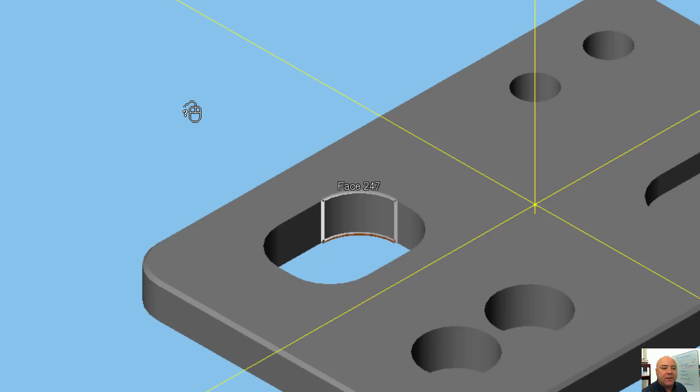The pocket that we have here that goes through the part is this one in the upper left-hand quadrant. We're going to go ahead and select this face. When we're in our sub-element highlight mode here, it asks us again, is this the surface you want? So that is the surface that I want.

But what I want to do is hold down the Shift key while I left-click, and then it will select all of the similar surfaces that are adjacent to that. So what it's done now is it's selected all of the surfaces that define the edges of that pocket.

If I go over here to my Create Features toolbar, I can select the pocket icon right here, and it will create this pocket chain feature, which is what it really is. It's a way for Esprit to identify that we intend for this to be a pocket. It looks like a pocket to us in this orientation, and we've now told Esprit that yes, indeed, we want that to be a pocket.

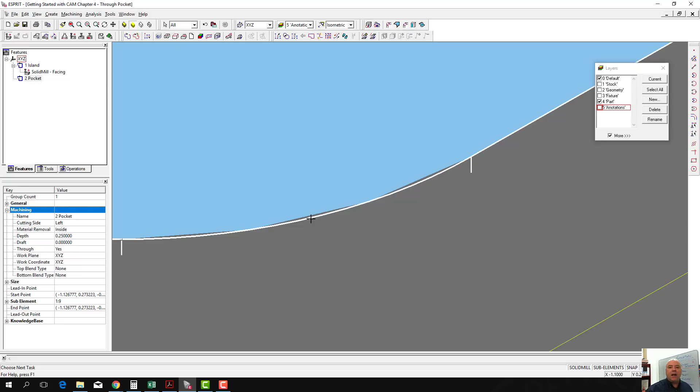And when we have our pocket here, if we go to our parameters view in machining, we can see that we want to cut on the left side of the pocket. If you look here, there's an arrow that goes around the edge of the pocket. So it's telling us we want to keep the tool on the left side of the pocket.

And if we're doing just a contour in there, if we're doing a climb milling operation, then if the tool's spinning clockwise and we're offset on the left side inside a pocket, it's going to climb around that edge. So I kind of like that. We're going to remove material inside.

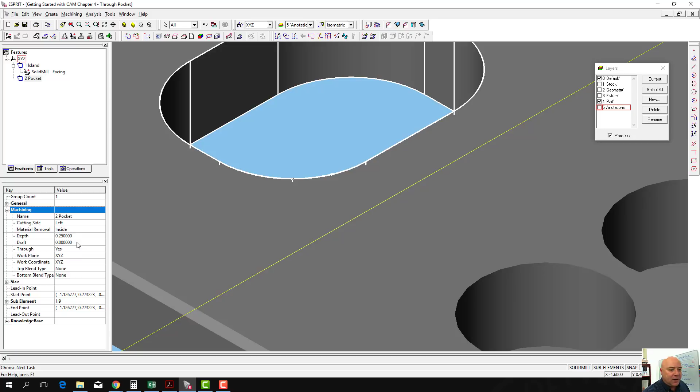It says the depth is 0.25 inches, and that's because the distance from here to here is 0.25 inches. It says the draft angle is 0, which means if we had created a solid model that had a draft angle, Esprit would detect it right here. We're working in the XYZ work plane. All these things, we like this.

All right, so we can create our pocketing operation simply by selecting that pocket. We'll go to our Solid Mill Traditional toolbar, come over here to the pocketing icon, and select that. Now, just like with our facing operation, you have to tell it what tool you're going to use. We have to use a tool that can fit inside our pocket. So we're going to use this 3/8 inch end mill.

I'm going to drag the properties tab down a little bit so we get some more space up here. It asks us, do we want to do roughing passes? Do we want to do wall finish? Do we want to do floor finish? Now, since the pocket's going to go all the way through the part, we absolutely don't want to do floor finish. We're actually not going to do the wall finish either. We're going to set that to no.

It's typically better to set this to no and then do a contouring operation later to do your wall finish if you want to do that. Just do it in separate operations. It gives you a little bit more control with how you do it. In the strategy tab, there's a bunch of different choices. We can choose, do we want it to start on the outside of the pocket and work towards the center?

Do we want it to start in the center of the pocket, work towards the outside? Do we want it to simply go in one direction, starting at one edge of the pocket and go across to the other? We can zigzag like we did with our facing operation. We've got our trochoidal, which is where it will actually take little circular passes to go through the entire pocket, and then profit milling. We're going to leave these things for later in the discussion.

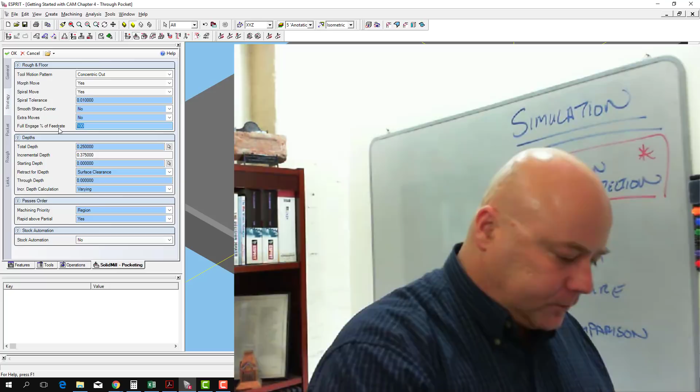Now our full engaged feed rate, we can actually look up on our feed and speed chart. But what this is, here I've got an end mill right here. Whenever the entire end mill is engaged with the workpiece, so if it was feeding through like this and making a slot in the workpiece, that would be when the full engaged feed rate kicks in. And so typically we do 80% for this. So I'm going to set that to 80.

Our total depth, it read this total depth based on the depth from our pocketing operation, remember there. Our incremental depth, because we're using the 3/8 inch end mill, our incremental depth that we're allowed to do is 3/8 of an inch, so that's fine. Starting depth is 0. That starting depth is measured from the top of the chain that you've created. We like all this. We can have stock automation on or off here. It doesn't really matter because the workpiece is in the center here and we don't need to trim anything. On the pocketing tab, there are no islands that stick up in our features, so we can ignore this.

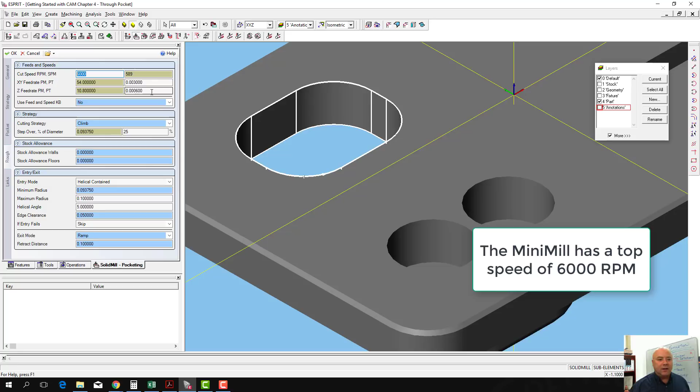On the rough tab, this is where we get to set the feed and the speed. Our tool is able to go much faster than this 589 surface feet per minute, but the mini mill that we're going to cut this in is limited with a maximum speed of 6,000 RPM. So we're going to stick with that. So 54, 10. These numbers look okay. You can verify these numbers on the feed and speed chart that you downloaded in the last exercise. Don't just assume that every time I'm doing this, I've got the correct numbers here. Make sure you look those up.

We'll go with our cutting strategy climb. That way, when it is not fully engaged, it will be pulling itself into the workpiece as it goes around there. Stock allowance walls, 0, floors, 0. There's a couple different entry modes that are possible. What we don't want to do ever is plunge. We don't ever want to have that end mill move straight into the workpiece on a downward plunge, because we know at the center of the end mill, the surface speed, the cutting speed is 0, and so it's not intended to cut in that direction, or it doesn't cut well.

So we can either do a helix, where it does a spiral on the way down, or a ramp. Just based on the shape of this pocket, I'm going to go with ramp. So ramp along pass. I like ramp along pass. For these tools, we want a ramp angle of 10 degrees.

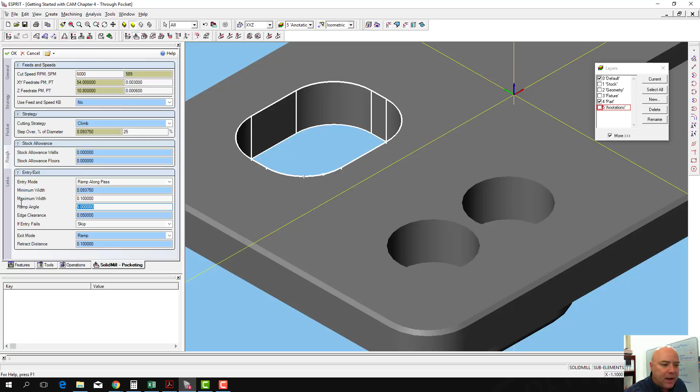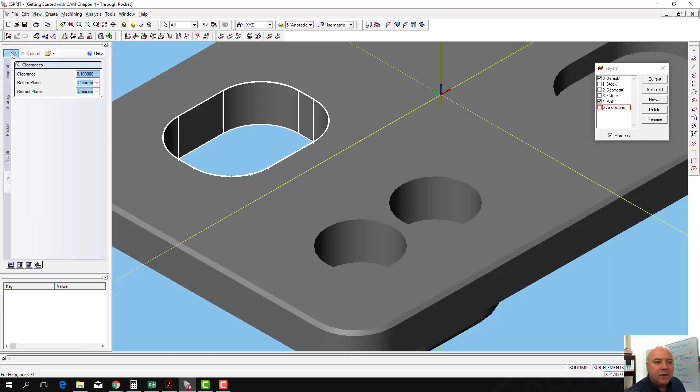Minimum width, maximum width. If entry fails, skip. Make sure you select this. If entry fails, skip. And then the only other option there would be plunge, and we never want to plunge if we can avoid it. So exit mode is ramp. That looks fine. Links, clearance, okay. So we'll go ahead and click OK here, and it created us a tool path.

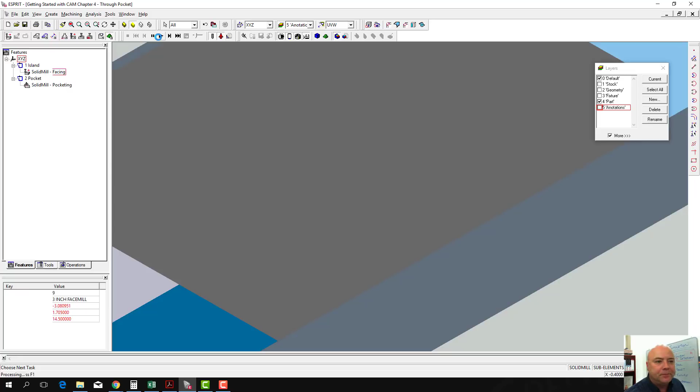If we go ahead and simulate, now before we simulate, let's make sure that we've got collision detection turned on. So collision detection, full. I'm going to go ahead and click OK. We'll simulate the operation here. So it's doing the facing pass now. It's finished with the facing. It should do our pocketing operation.

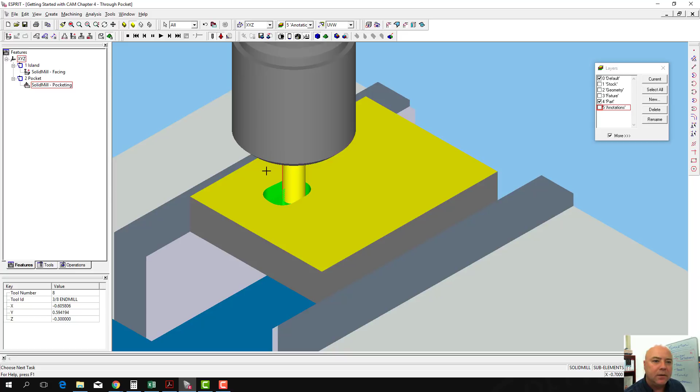Okay, so it's coming in. That's doing the ramp down into the workpiece. Once it gets down to the depth, it will go ahead and spiral out to the finished dimensions of the workpiece. I can speed that up. All right, so that's done. I'm going to go ahead and turn on our comparison window here. And so it shows that the floor is blue there, but that should go all the way through.

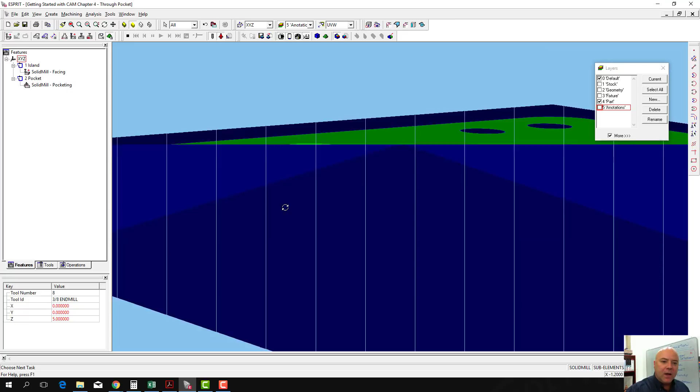Now, at the beginning, I said that I wanted our pocket to actually go all the way through the workpiece, not just through the part. And so we can fix that. If we hit stop here, if we know the thickness of our part, and if I go to the front view, now I happen to know that the thickness of the part is 3/4 of an inch. But if you didn't know that and you hadn't defined that stock material, you could estimate it by simply mousing over the bottom. Oh, I gotta turn stock on.

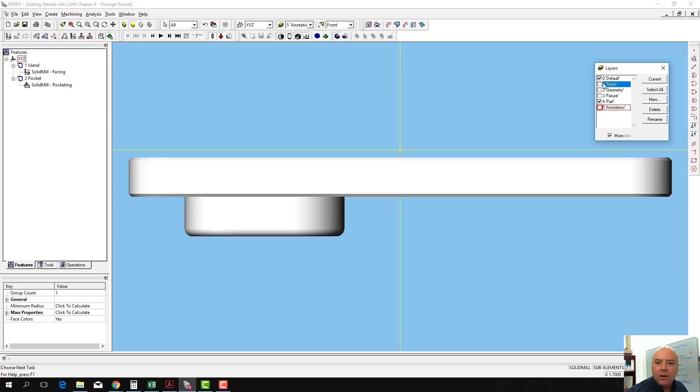Turn the stock layer on, and simply move the mouse down to this point, and in the lower right-hand corner of the Esprit window, it'll tell you that you're at minus 0.80 inches. So that gives you some indication of where the bottom of the stock material is. There's several ways to know this. I do know that the stock material is 3/4 of an inch thick. We've already removed 50 thousandths, so it should be 0.7 inches thick at this point.

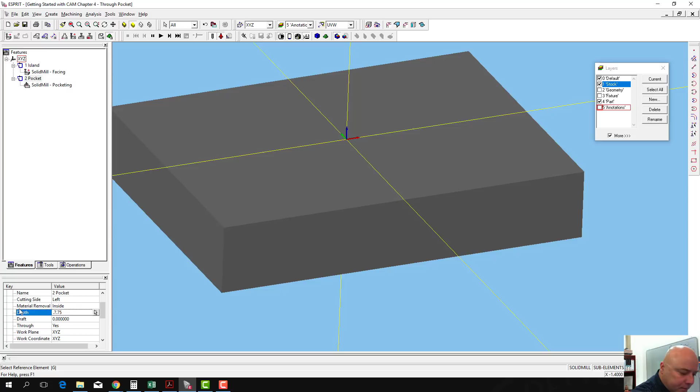What we can do here is go to our pocket definition. In the pocket, in the depth here, we can actually change that to be 0.7, or why don't we just go ahead 0.75. And so what that'll allow us to do is, just click anywhere to get rid of that, it will go ahead and extend the definition of that pocket to go beyond the bottom of the workpiece now. And then if there's any radius on the bottom edge of the tool, we'll be beyond that bottom edge of the tool. Our tool will go all the way through the workpiece now to do this.

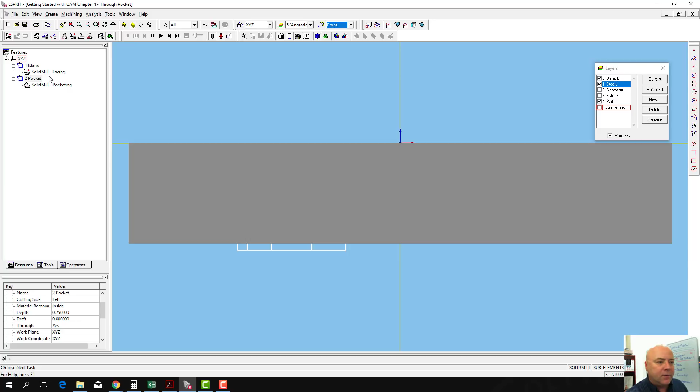If I go ahead now, play. Oh, no, I gotta go back. Sorry, I gotta go back to my pocketing operation. In the pocket strategy tab here, where it is total depth here, if I right click and say system default, it updates now to that 0.75. Now I didn't have to change the definition of the chain that defined the pocket.

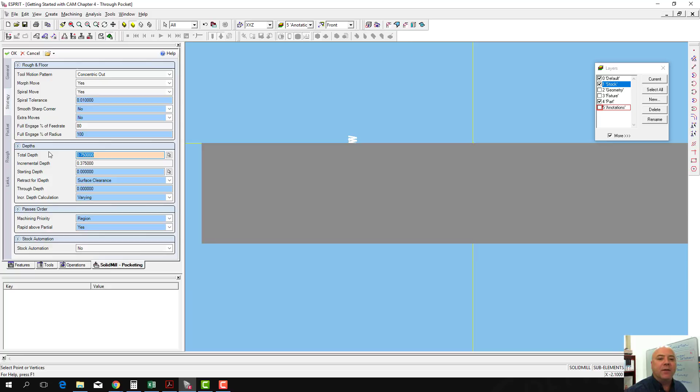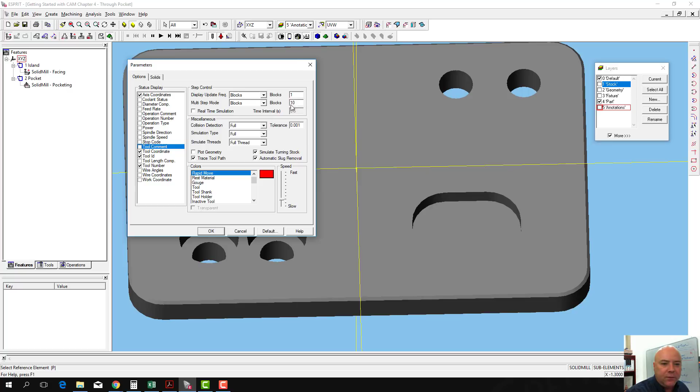We could have just come in here and we could have typed 0.75, and then that tool would have gone all the way through. But if I click OK, now we see that the tool comes through the workpiece. And we'll see if we turn off the stock in this view that it goes down. It actually has 2 levels where it goes around like that. So now let's go ahead, run our simulation again, make sure that we've got full collision detection turned on, run the simulation. It does the facing operation first, and then it does the pocketing operation, and the pocket goes all the way through.

Now the reason we want this pocket to go all the way through is because in a future operation we're going to flip the workpiece upside down and put it back in the machine tool, and we want to use the center of this pocket as our work offset so that we can locate the features on the part after we've flipped it over. Alright, so that is our through pocket.